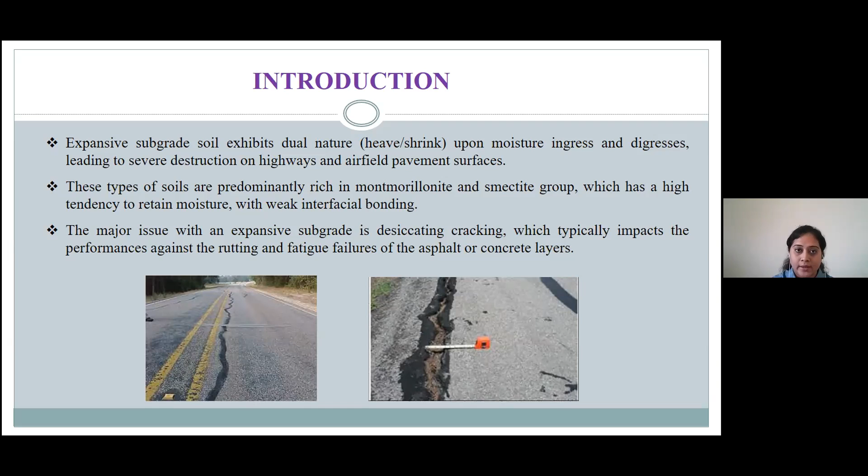For stabilization of this expansive soil, usage of chemical binders, traditional cementitious chemical binders like cement, lime, etc., efficiently helps to reduce the swelling potential of these soils. However, the production of cement and lime contributes to almost 7 to 8% of carbon dioxide production across the globe annually. Globally, demand for Portland cement-based binders can reach almost 200% if we count from 2010 to 2050.

So in order to maintain a sustainable environment, it is always necessary to reduce the production of these greenhouse gases, to reduce the production of carbon dioxide from these conventional cement binders, and use alternative environmentally friendly material for stabilization of these expansive soils.

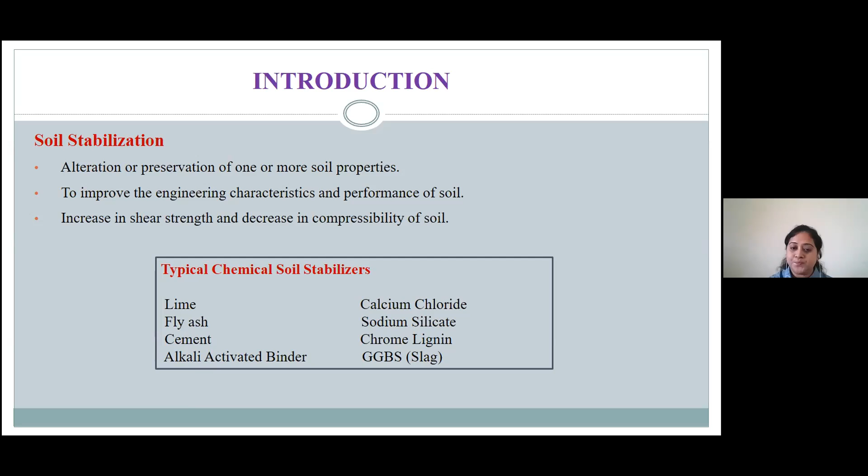So what have we done in this study? We have proposed a novel additive, alkali activated binder, which is a low carbon emission alkaline agent. It has a long chain polymeric sodium aluminum silicate compound when we activate low calcium precursors like fly ash or slag. This alkali activated binder eliminates the demand for use of traditional binders like cement, saves the cost for dumping, and provides excellent durability with a low carbon footprint.

AAB, or alkali activated binder as we call it, is prepared by blending aluminosilicate precursors - we have used fly ash and slag in certain ratios - with an alkaline solution consisting of sodium silicate and sodium hydroxide. We have chosen 3 water-to-solids ratios: 0.3, 0.4, and 0.5. If we use a water-to-solids ratio less than 0.3, workability becomes an issue, and if we increase it beyond 0.5, it becomes too liquid.

Also, this fly ash and slag which we are using, we generally get it from the thermal power plants. So in that way, we are utilizing the waste materials, which can lead to a sustainable and environment-friendly solution.

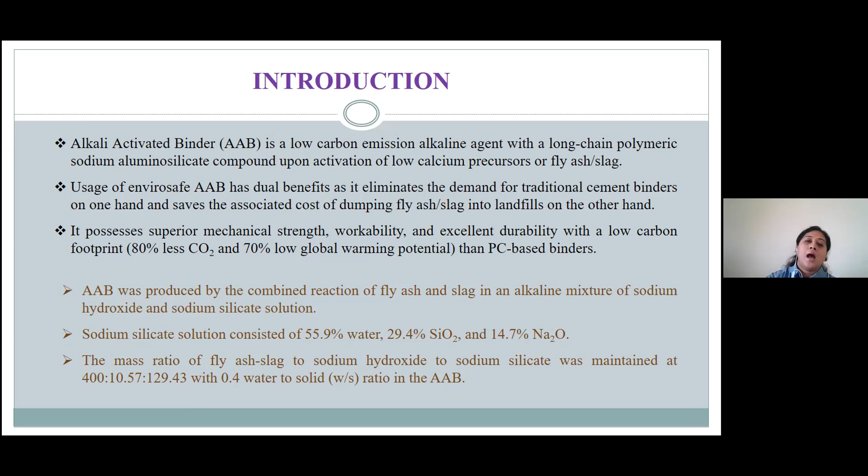I'll go to the preparation of AAB. This is a schematic process by which we prepare AAB. We have taken oven-dried expansive soil and mixed it uniformly with around 5% of AAB at different proportions of fly ash and slag content. Different proportions in the sense we have used 100% fly ash, 0% slag, then 90-10, 80-20, up to 60-40.

This optimum binder content in the soil is chosen based on its workability, the alkaline reactivity, the binding efficiency, with low emission of greenhouse gases.

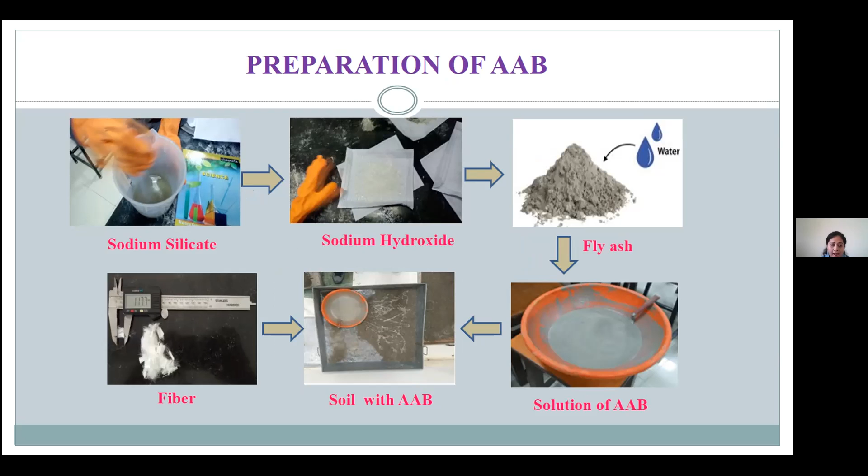Then, after mixing of AAB, we have covered it with jute bags for the next 3 days, around 72 hours, at room temperature, so that the excess heat arising due to the geopolymerization reaction evolves out.

After mixing the AAB with the soil, we have gone for different characterization tests. I will present some results of the characterization tests, starting with the microstructural characterization.

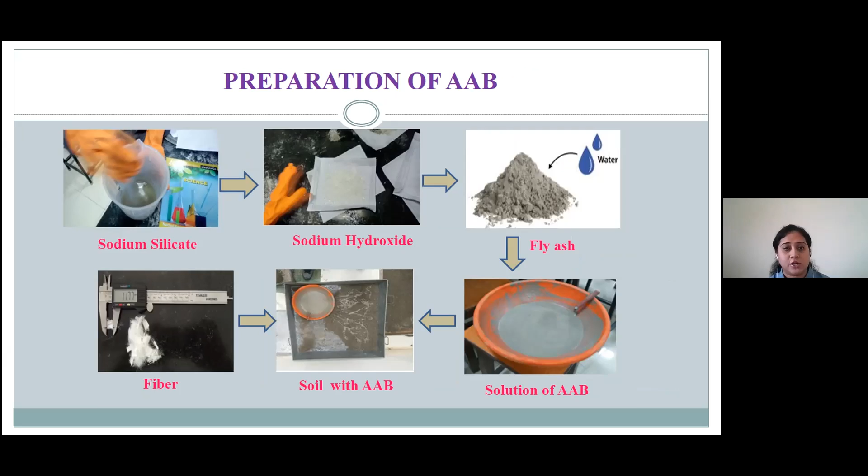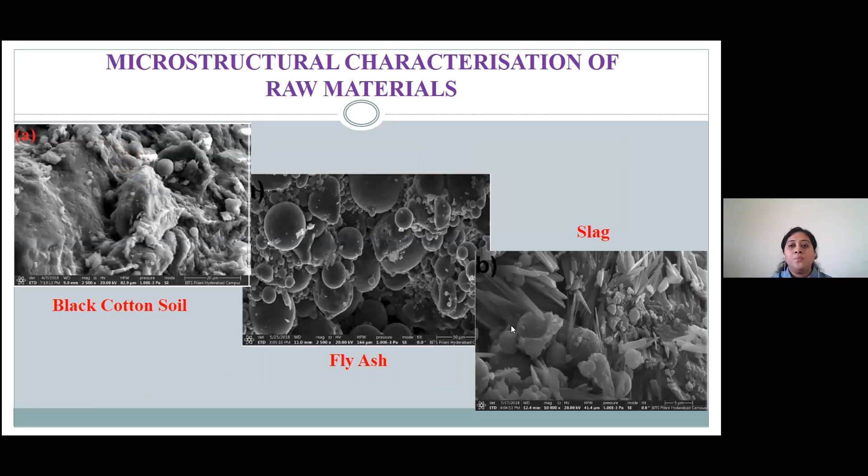Now, these are the raw materials which we have used. This is black cotton soil, and this is fly ash and slag, and these are some SEM images of the raw materials used in the study.

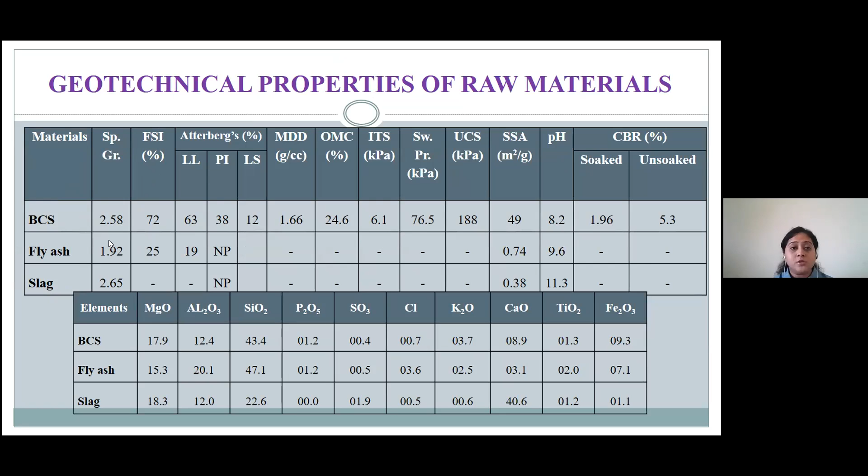These are the geotechnical properties of the raw materials, that is our black cotton soil, fly ash, and slag. We have found out all the basic geotechnical properties, including the swelling, the plasticity limits, the compaction characteristics, the strength characteristics, and also the different elemental compositions of the raw materials.

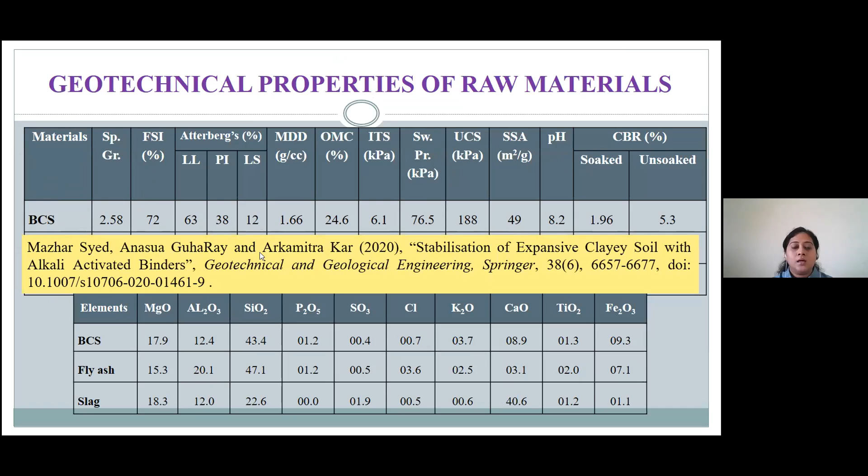Some of these studies can be found in one of our papers, published recently in Geotechnical and Geological Engineering. This is the particle size distribution of our raw materials: fly ash, raw BCS, and the slag. And we have used 5% of AAB.

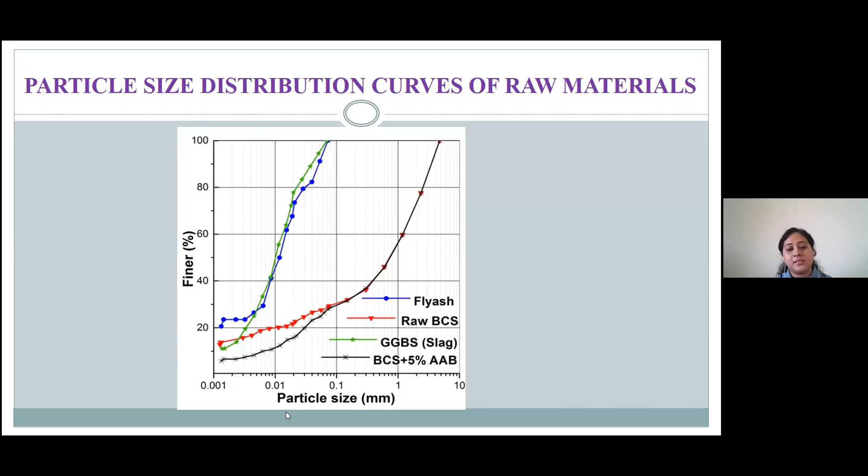Rather, we have tested from 2 to 10% of AAB, and found out that 5% AAB is the optimum content. So we have presented here the graph of 5% of AAB.

We have also used the fibers. Rather, we have used 4 types of fibers for comparison: 2 natural fibers and 2 synthetic or artificial fibers. The 2 types of synthetic fibers which we have used are polypropylene and glass fibers, and the 2 types of natural fibers which we have used are the coir and the hemp fibers.

A constant length of around 12 mm is maintained for the artificial fibers, while that of 25 mm is maintained for the natural fibers. These values are chosen from the past literature.

It was observed that when we reduce the fiber lengths less than 10 millimeter and greater than 40 mm, it demonstrated actually low contact area, and it was difficult to achieve higher pull-out intensity during the loading.

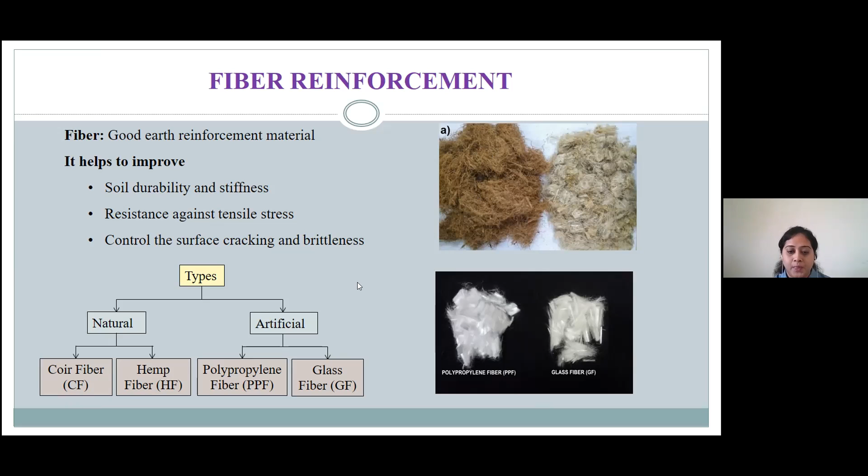All these details can be found from one of our papers, which was published in International Journal of Geomechanics.

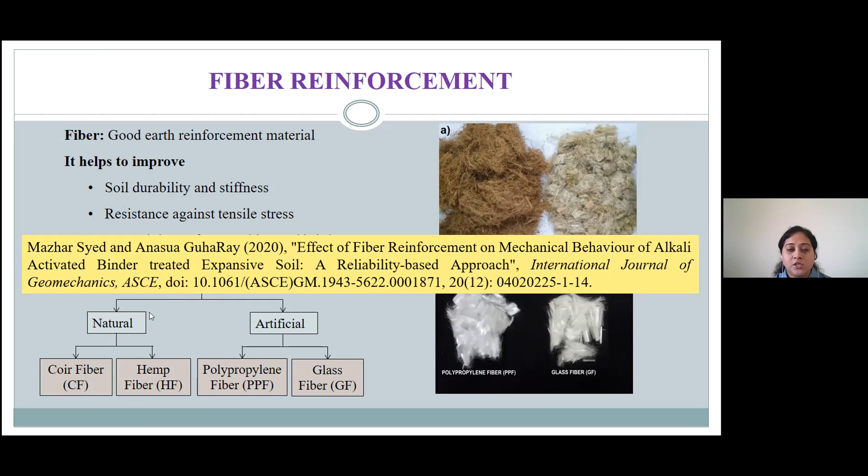These are the different properties of fibers, some of which we have found from the manufacturer and some of which we have tested in our lab. So these are the different properties of fibers which we have found.

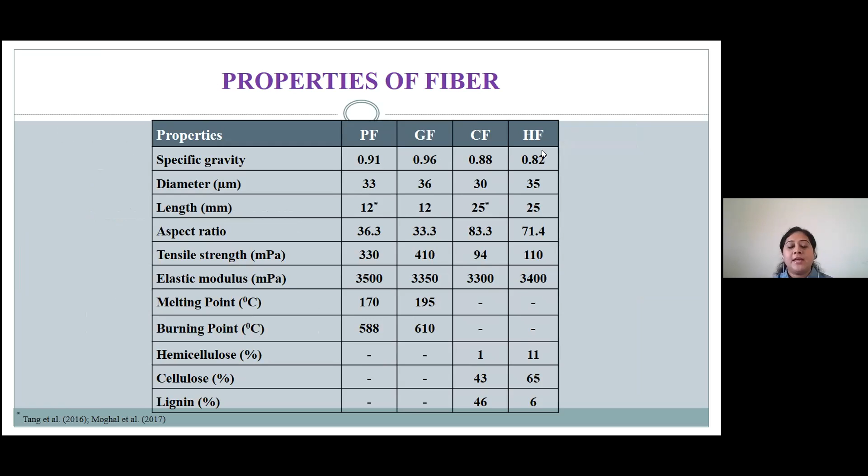PF is the polypropylene fiber, GF is the glass fiber; these two are the artificial fibers. And then we have the CF and HF as the coir and the hemp fibers.

Since the natural fibers have always the problem of biodegradability, the cellulose and hemicellulose rich natural fibers were chemically treated with 10 molar sodium hydroxide solution prior to use.

Initially, these fibers were immersed in water for 7 days. Then it was again dried for 7 days at room temperature, so that we ensured the waxy substances and natural oil are all extracted.

Then these dried fibers are soaked in sodium hydroxide solution for 7 days. The soaked fibers are then removed from the sodium hydroxide solution, washed with water properly to remove the residual alkali from the fiber surfaces. And then it is again kept for drying for 7 days at standard temperature.

This treatment actually helped us to improve the service life and the durability of the fibers.

The primary reason for selecting these natural fibers in this AAB mixed soil are negligible environmental impact, sustainability. These fibers are locally available, and also obviously the cost effectiveness.

Now we come to the fiber treatment details, which can be found in one of our recent published papers.

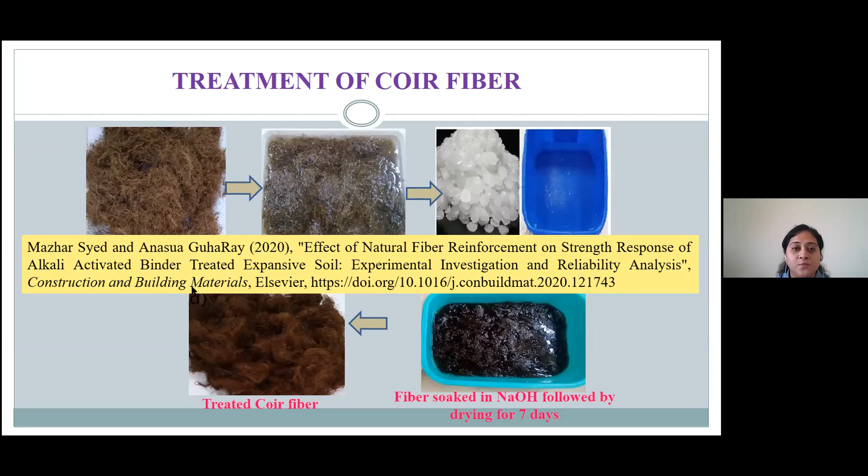I'll give glimpses of the different microstructural studies we performed. This is the XRD pattern for the untreated and AAB fiber treated soil. XRD is used to determine the mineralogical composition of the soil. This XRD is obtained in powdered form, on samples from 0 to 80 degrees at 2 seconds per step, using CuK alpha rays with 40 milliamperes at 40 kilovolts.

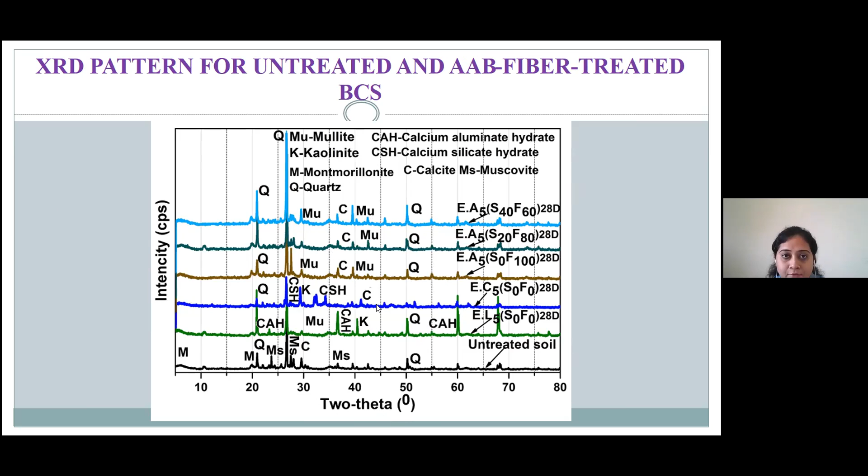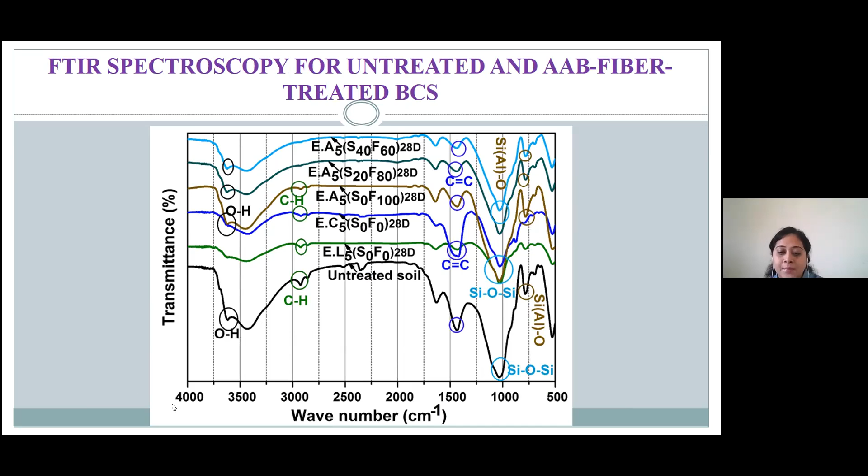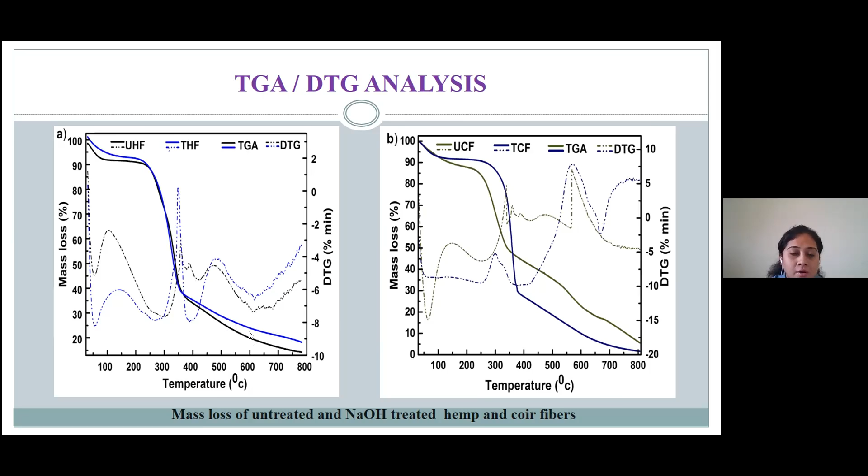Comparing the results with the parent fibers, the position of the bands for both the treated fibers is presented here for hemp and coir. For both treated fibers, the position has changed and shifted towards the right, as you can see in the blue graph. The TGA curves beyond 600 degrees Celsius show minimal losses.

UCF is the untreated coir fiber and TCF is the treated coir fiber. The untreated and fiber reinforced AAB soil samples were molded into pellets and then oven dried before the samples were analyzed.

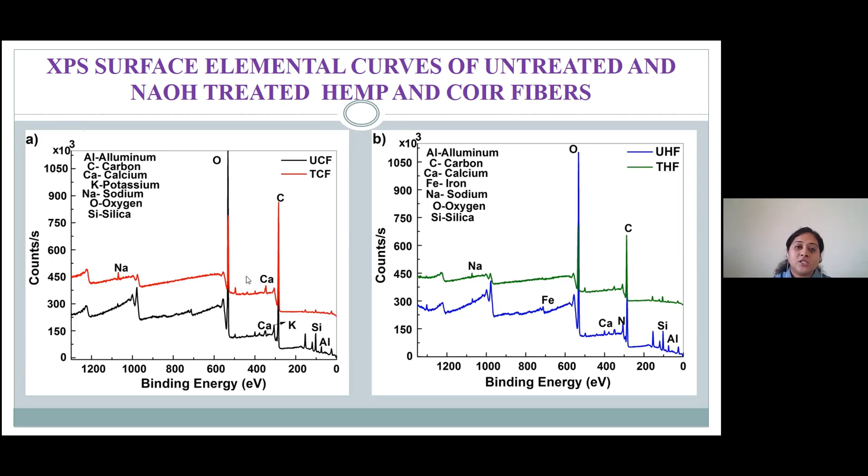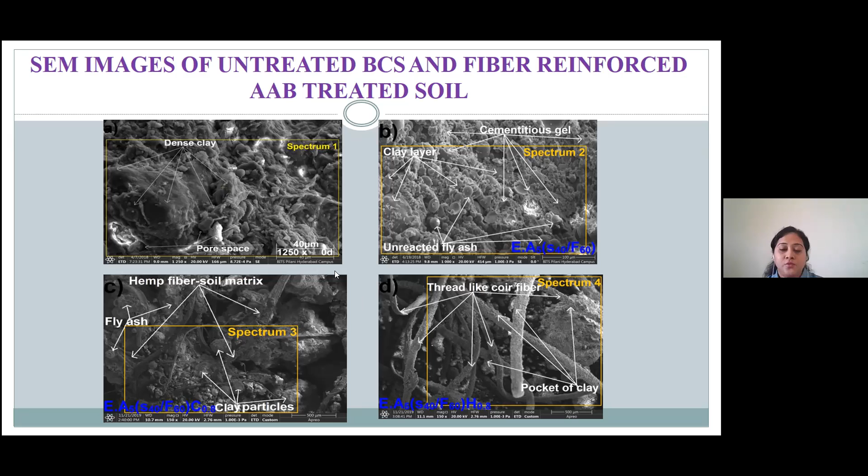These are the different microstructural analyses we carried out, and the details can be found in one of our journal papers in the International Journal of Geotechnical Engineering.

This is the basic geotechnical properties of AAB treated soil. As you can see, we have varied the fly ash and slag.

F100 means 100% fly ash, S0 is 0% slag. B is black cotton soil, A is alkali activated binder, and 5 denotes 5% alkali activated binder. So we have maintained 5% alkali activated binder, but varied fly ash and slag in the ratios 100:0, 90:10, 80:20, 70:30, and 60:40.

We have found out all the different geotechnical characteristics, including the compaction, the plasticity, the swelling, and the consolidation properties. We'll go to the tests directly.

We have performed the UCS, that is the unconfined compressive strength test, on samples of 38/76 mm at a strain rate of around 1.25 mm per minute. We can see from the results that inclusion of alkali activated binder and fiber has significantly affected the rate of UCS, the strength gain.

As the slag and fiber content increases in the alkaline soil, the interlocking density and the stiffness of resistance is greatly enhanced. And 60% fly ash with 40% slag has the highest compressive shear strength.

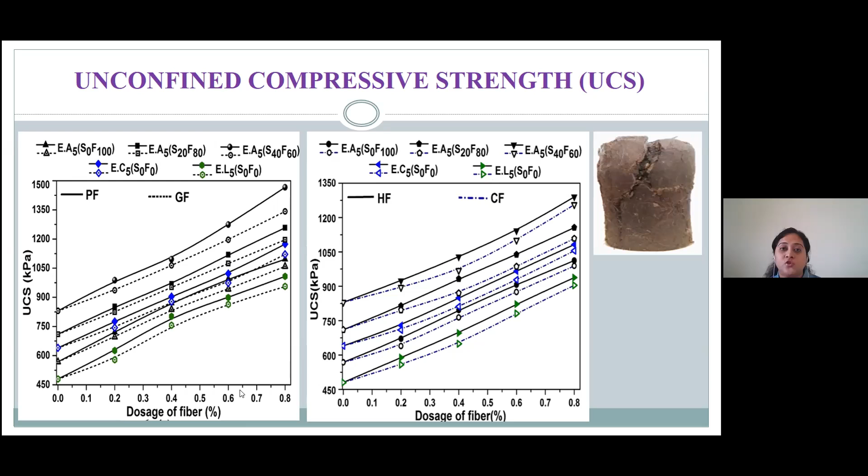We go to the ITS, or the indirect tensile strength. It was carried out in a Marshall stability apparatus by attaching a loading strip of around 12.5 mm on the load frame, and we also used a constant strain rate of around 50.8 mm per minute.

Keeping a constant fiber dosage, say 0.2 or 0.4, the tensile strength of AAB BCS is almost coming out the same, regardless of whatever type of fiber or whatever fly ash or slag proportions we are using.

The fibers are basically capable of sharing some stiffness in the soil matrix, and therefore it transforms the soil from brittle to ductile nature. This has been published in one of our earlier papers.

We come to the consolidation properties of BCS, which is an important property for expansive soils. We have performed a series of oedometer test results, and we have presented the void ratio versus effective stress graph.

The compressibility behavior of this AAB treated soil reduces significantly with an increase in the slag content. Adding slag to this soil alkaline mixture enhances the rate of geopolymerization in the soil, and this leads to a rapid dissolution of the precursor.

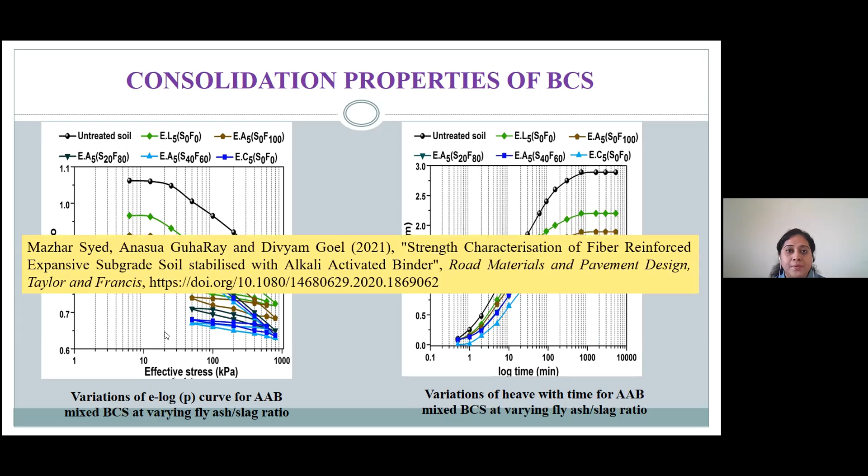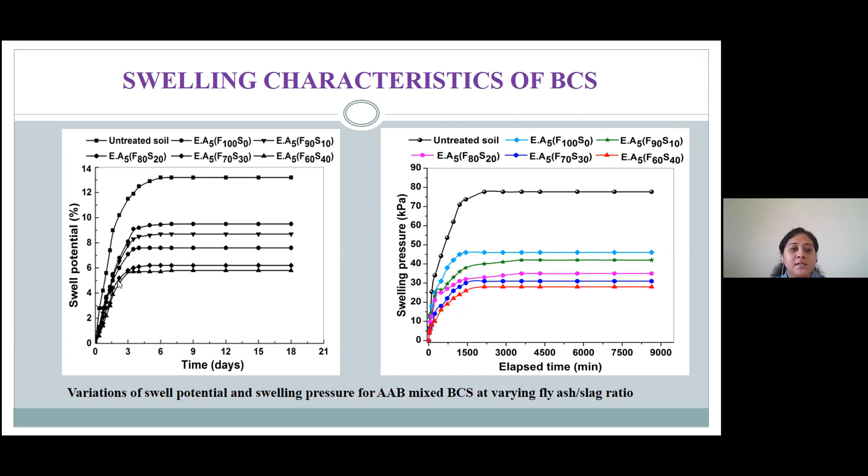This is the continuation of the oedometer test results, and this is the swell potential and the swelling pressure. We can see that the 60:40 ratio, that is 60 fly ash to 40 slag, gives us the maximum results. We used a swell pressure meter apparatus for conducting this test, showing the swelling pressure and the swell potential.

We have also carried out soaked California bearing ratio tests, and as we know, CBR indirectly gives a clue for the long-term efficiency and long-term working condition of the material. During the period of soaking, we soaked it for 4 days as we do in soaked CBR tests, during which the slag can produce silicate hydrates.

This leads to less attraction of moisture in the soil. The combined addition of fly ash with slag in this AAB soil helps to increase the strength and stiffness, basically forming a bridge when the geopolymerization reaction is taking place.

We have varied the dosage of fiber from 0%, that is using only the AAB, and then increased it up to 0.8%. As I've already mentioned, using fiber beyond 0.8% generally reduces the workability.

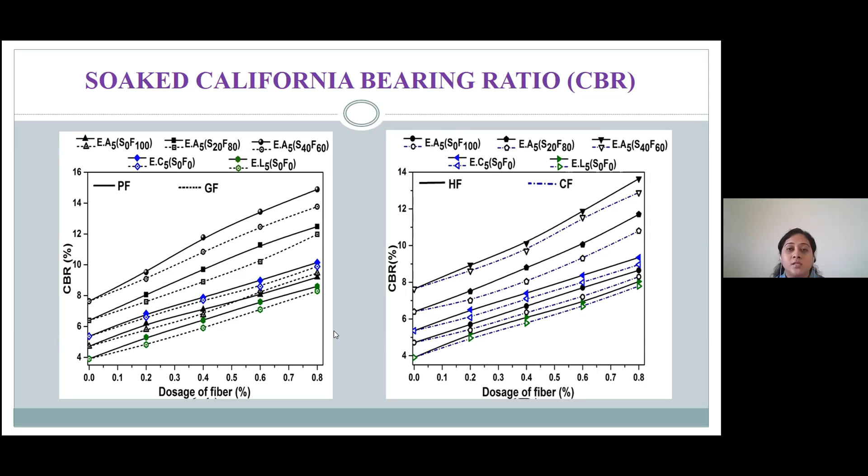This is a recently published paper, basically in press, so I have not given the DOI number. You can go through this paper to get more details on the performance evaluation of all 4 types of fibers.

We come to the last part of the study, the load deflection behavior of the untreated and fiber reinforced AAB treated soil. The load deflection curves reflect an apparent correlation of the soil flexural behavior with different fiber dosages, and the combined fiber AAB aids in improving the efficiency of the pulling stress and stiffness, because it restricts the relative movements of the fibers in the soil and helps transfer the load to the fiber matrix.

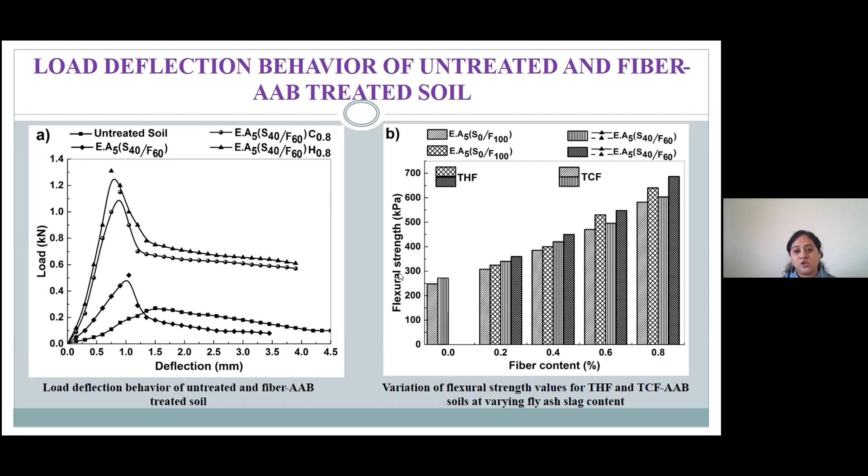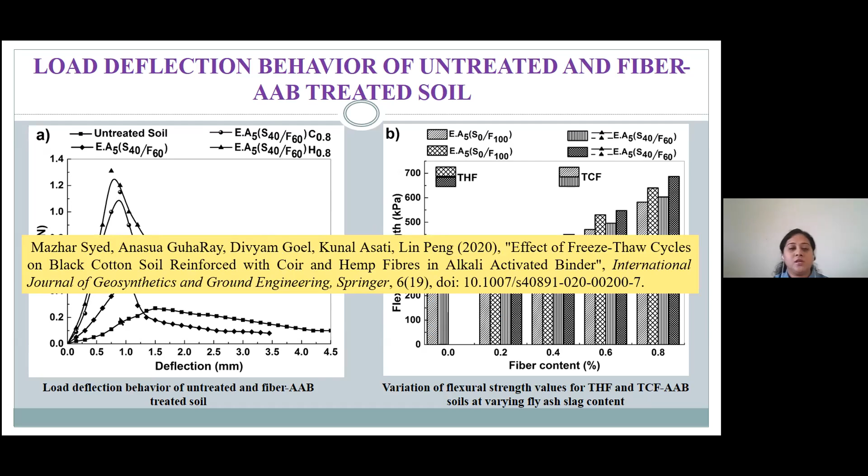Here is the load versus deflection curve, it reaches a peak and then drops. We have also found out the variation of the flexural strength of the soil at varying percentages of fiber content. This was published in one of the special issues of the Journal of Geosynthetics and Ground Engineering.

Coming to the conclusions, apart from the results presented here, we have also studied the freeze-thaw effect of this proposed binder along with fibers. There are certain studies done on the variability aspects of these fibers, because natural fibers and soil are variable in nature and we can obtain a range of properties. So we have performed some variability studies, some reliability analysis, and proposed some empirical equations. If you go through our papers, they will give details of these reliability studies which are available.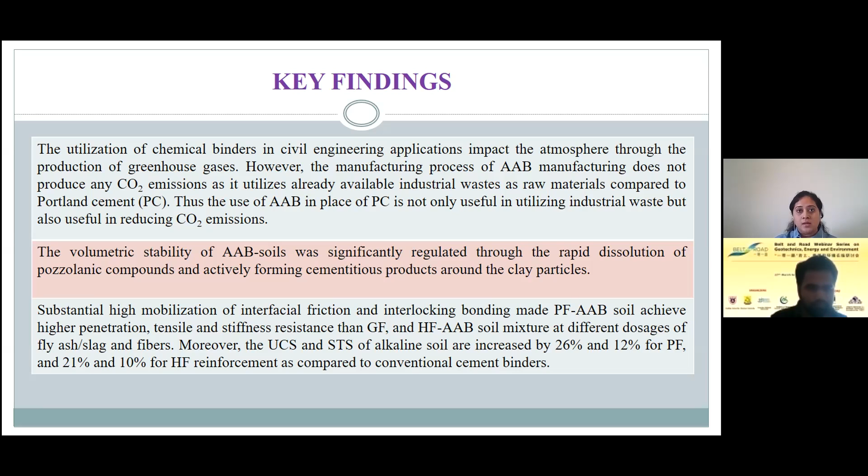In conclusion, utilization of chemical binders in engineering projects leads to the production of greenhouse gases. However, when we use AAB, we are using fly ash and slag, which are directly available industrial wastes obtainable free of cost or at minimum cost. It also reduces the carbon dioxide emissions that would occur if Portland cement were used. So it not only helps utilize industrial waste that would otherwise be dumped somewhere, it also helps reduce carbon dioxide emissions.

We have seen from our study that the volumetric stability of these AAB soils treated with fibers was significantly regulated, because the pozzolanic compounds are dissolved and there is rapid formation of cementitious products. We have seen how the strength, the UCS of the fibers, is getting increased.

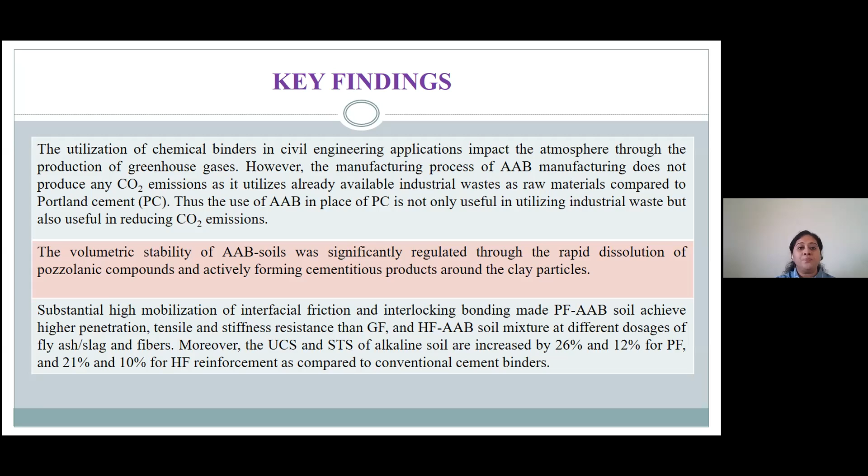In general, comparing the two types of natural and artificial fibers, polypropylene fiber gave better results compared to glass fibers, and the hemp fibers gave better results compared to coir fibers. We have also seen the formation of some groove-like, network-like surfaces in all the fiber mixtures, with the addition of fiber and the aluminosilicate precursor-based AAB.

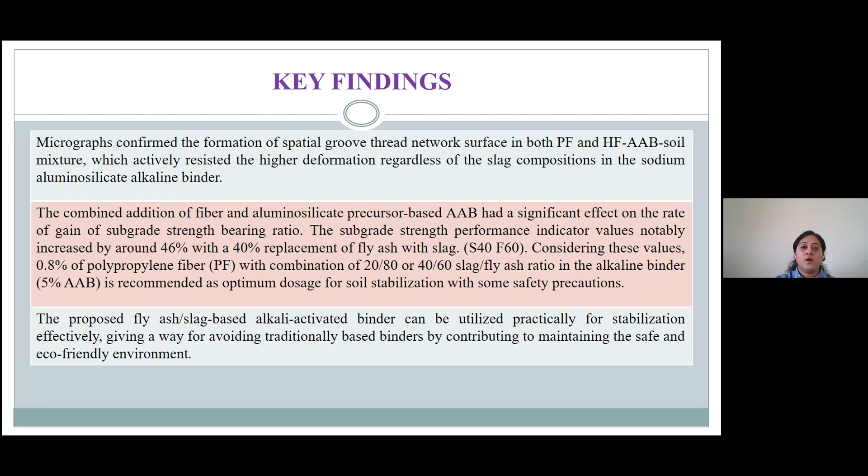We have seen that the optimum combination is 60% fly ash and 40% slag, with addition of AAB in the range of 5%, and we can use 0.8% of fiber. So in conclusion, this proposed fly ash or slag based alkali activated binder can be utilized practically and effectively, and it gives a way forward from traditional based binders, making this method sustainable and a more eco-friendly solution.

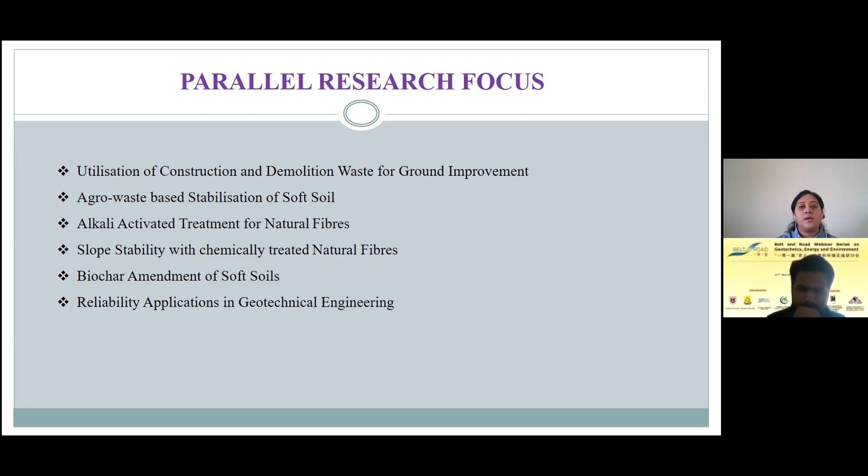Apart from this, my research also covers utilization of construction and demolition waste. I also work on agro-based stabilization of soft soil, natural fibers, slope stability with treated natural fibers, biochar amendment, and reliability applications in geotechnical engineering.

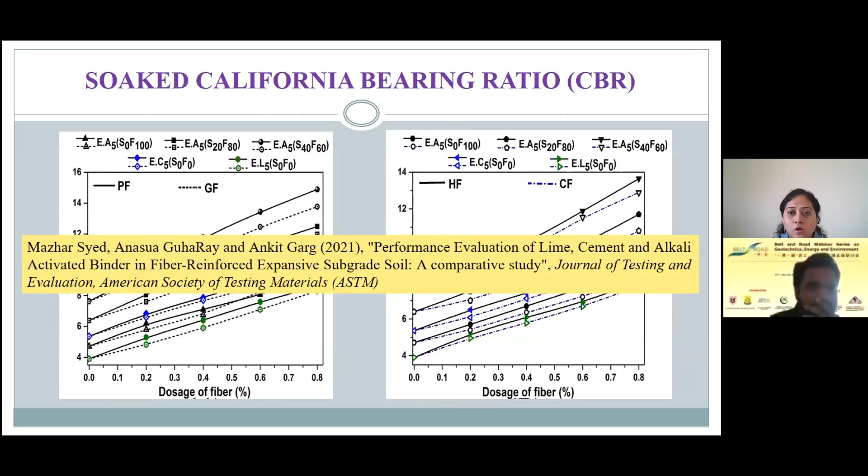Professor Anasua, I just have one point. I want to understand what are the major challenges still, if we apply these techniques in field application?

That's a very nice question actually. The major challenge is the evolution of heat. When we mix the fly ash and slag with the activator solution, a large amount of heat is evolved. So what we have done is, after mixing the fly ash and slag with the alkali activator solution, we have kept wet jute bags so the geopolymerization reaction can be completed and the heat of the geopolymerization reaction can dissipate. So that is one of the major challenges in the field.

We are in the process of implementing this entire process in the field. I have not presented the results here, but we are preparing this at large scale, storing this particular binder for around 24 hours. We are seeing that within 24 hours maximum of the heat is dissipating, and then we are using a rotavator and mixing it with the soil. So this heat evolution is a real challenge.

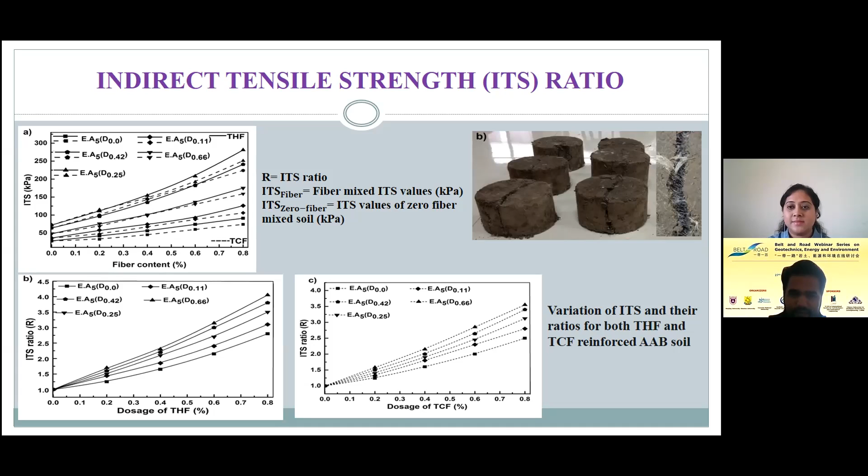Yeah. That's good, I think it's quite an interesting topic. You have mixed fibers with some form of optimal mix with chemical. So how about the degradation of natural fiber? Do you expect it to degrade?

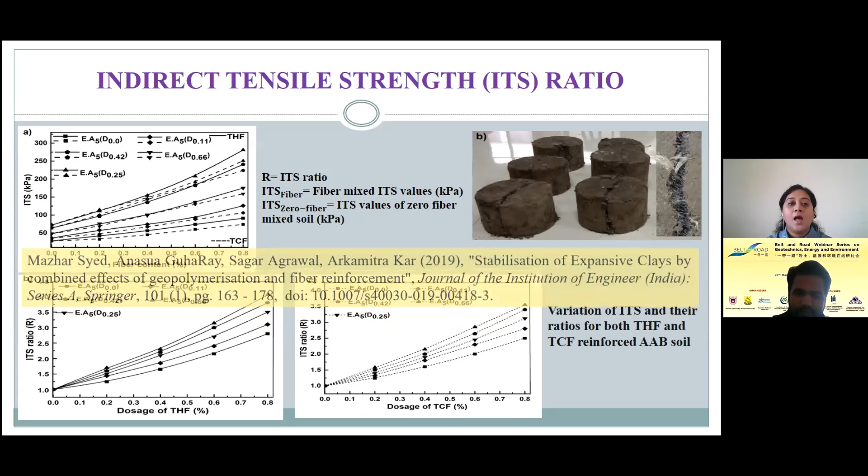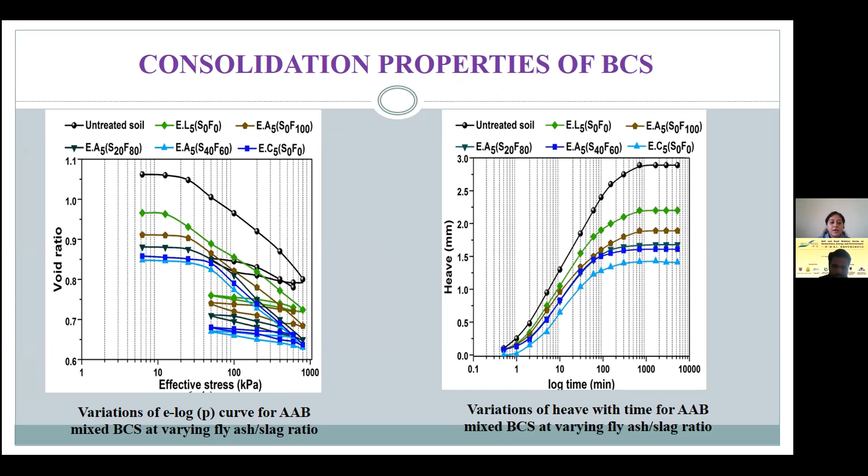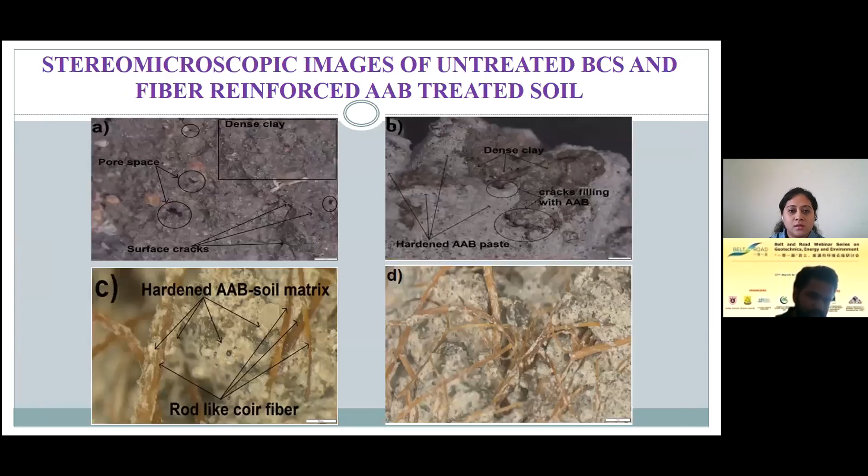Yes, natural fiber degradation was definitely a real challenge. But when we treat it with sodium hydroxide, as I showed in the process, we soak it in this sodium hydroxide solution. Although we have not exclusively conducted durability studies and are in the process of doing so, the strength of a single fiber increases extensively after this treatment. But yes, it is definitely a natural fiber, so with time, after years, it is bound to degrade. That is always a challenge.

So this fiber is kind of coated, right, with the sodium hydroxide? I didn't get it, so is this fiber coated with sodium hydroxide? Yes. Okay, okay, then I think it's fine.